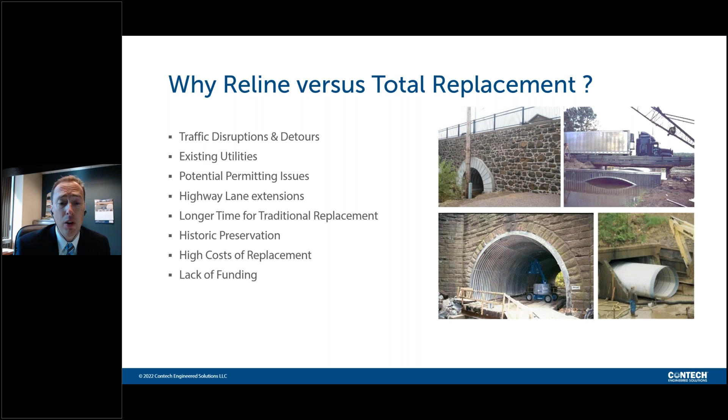If you've seen the past 2 years of where we've talked about pipeline rehabilitation, this agenda won't look new to you, but we're doing it a little differently this year. The last couple of years we focused on 7 critical design considerations, walking through each one and showing case histories. This year, Andrew and I are doing it differently: we're going to focus on 4 specific case histories and show how the engineer and contractor went through each of these design and construction considerations, diving deeper into specific case histories and showing you where and how these considerations affected each project.

One thing I'll point out is the fourth design and construction consideration, material and method selection. It's kind of an overlying consideration as you look at each of the other condition assessments, the hydraulics, the structural design. That's really what informs the material and method selection we're talking about. So it won't be a specific slide, but something looked at in each situation. After we finish our four case histories, we'll go through and reiterate the value that Contech brings and some of the other items you have at your fingertips.

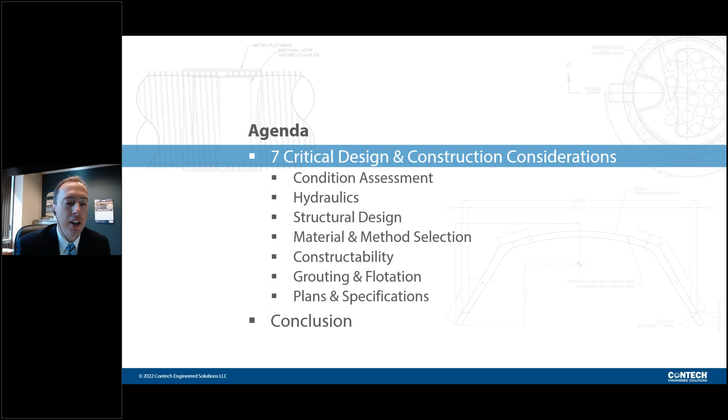I would be remiss if I didn't talk about the 14 products that we have for pipeline repair, bridge repair, and extensions. Today we're going to focus primarily on drainage structures, so storm sewers, culverts, and sanitary sewers. That's going to limit the products that we're going to talk about.

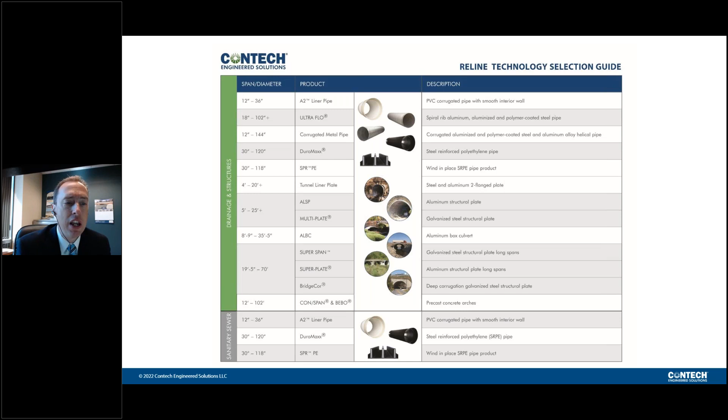On this slide you can see, especially from the bridge side, where we can actually reline a bridge, if you will, and we have that capability and that experience. So this is something that is available to you. Just because you're replacing a bridge, Contech can still help. But we're going to focus today more so on the drainage side.

So diving in first into our case histories. The first one is coming to us from Nebraska, and it's the Candlewood Reservoir Reline project. You can see from the aerial picture, a reservoir with a principal spillway, and that principal spillway was a 48-inch RCP.

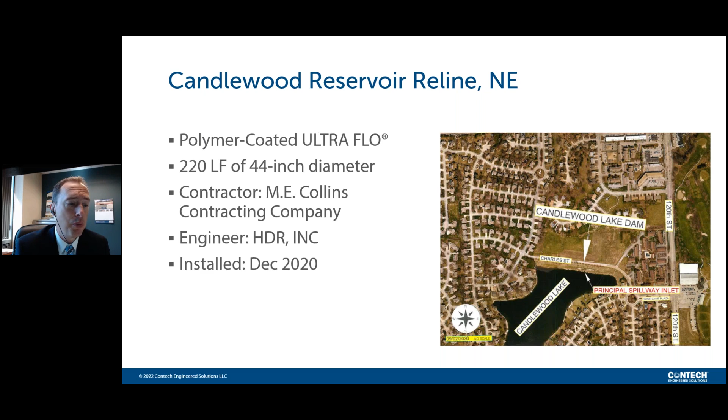If anybody has worked with dams in the past, obviously digging down and replacing infrastructure through that dam can create potential future challenges, just because of removing some of that soil and then having to put it back into place. HDR out of Omaha was the design engineer. Sean Bell was the engineer who worked with it primarily, and it was installed in 2020.

And then a profile view - this was taken from some plan sets that were pretty old, so it's not as clear as it could be, but it gives you an idea of the profile and the fact that we're close to 30 feet deep. So not only digging through a dam was a challenge, but the fact that it was 30 feet deep.

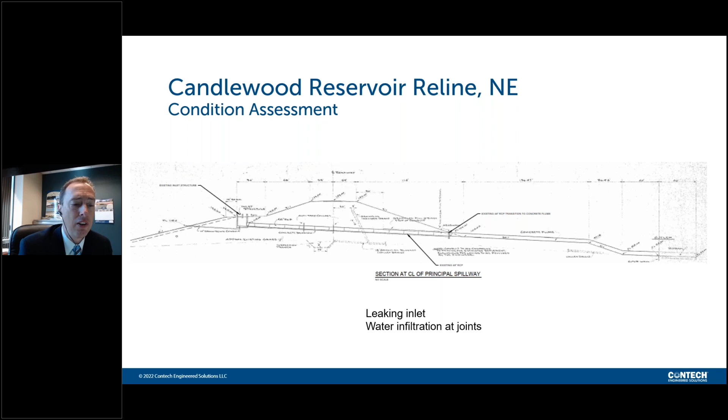HDR started off pretty quickly with, hey, can we rehab this without having to dig down? The challenges they were having was leaking at the inlet, which they were able to stop using separate materials. And then the real challenge that this project was focusing on was water infiltration at the joints.

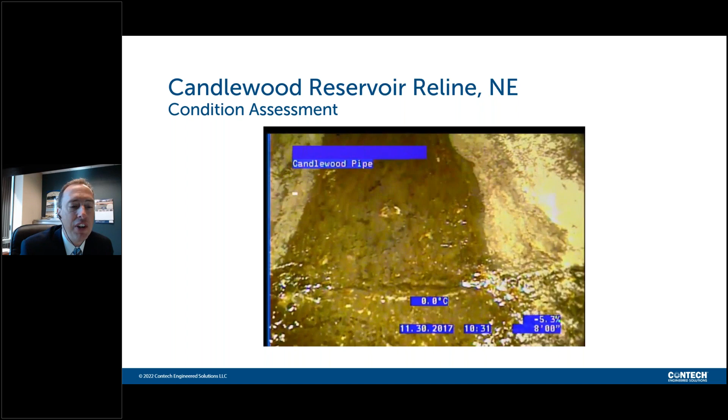So this is a video I'm going to show to you. This is some of the CCTV that we were provided with, and you can see in the RCP there's some spalling in the invert, and as the rover moves forward you see continued spalling, and it's going to stop at the next joint. This is not the entire CCTV, just a section - the entire CCTV was about half an hour to 45 minutes long.

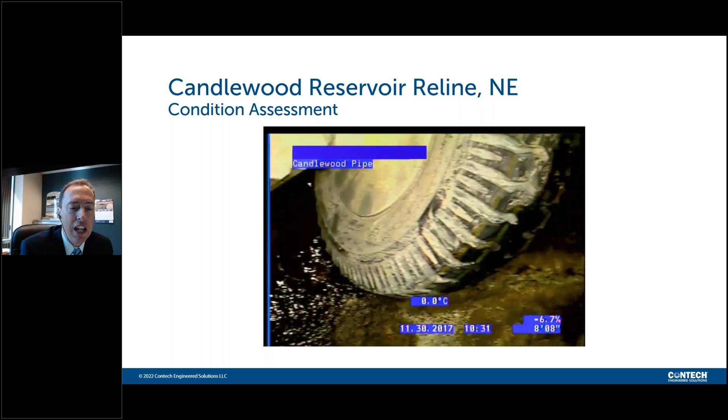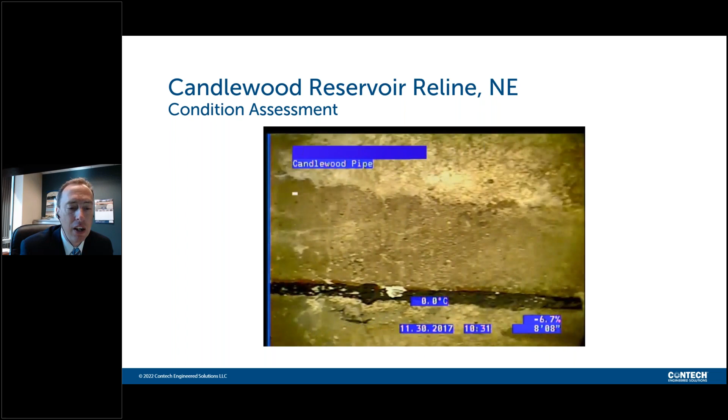As this pans up to show the joint, you can see some previous repair methods the owner had done using Ram-Nek and other types of materials to seal the joints to keep water from infiltrating through them. It's going to pan over to the rest of the area, and you'll be able to see some of the joint challenges the owner was having, which was the real reason they were looking at rehabbing this and stopping that infiltration.

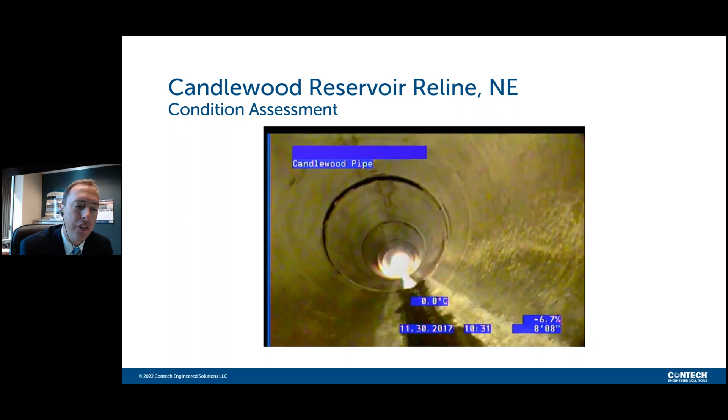As this video resets, you'll get to see some of the misalignment that had started to take place, and they were trying to offset some of that as well. So we had some relatively good information from the condition assessment that was taken.

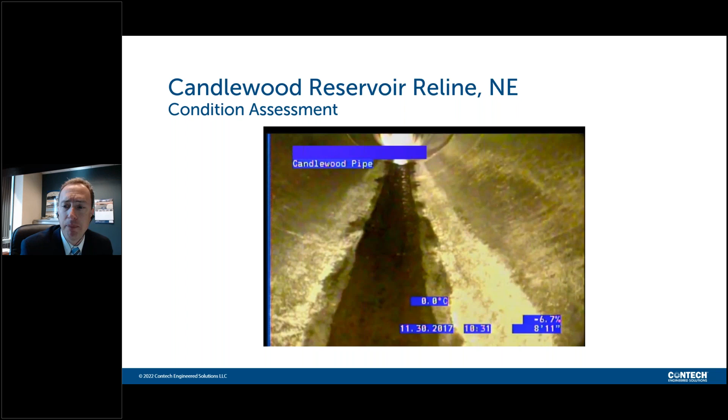With that, some of the first calculations HDR did was to determine hydraulically what was needed here. Hydraulically speaking, we were told we needed a Manning's n minimum of 0.012 and a minimum diameter of 44 inches, which obviously is not a standard diameter as you have it. So we started looking at three different products.

The first one is a DuraMaxx SRPE. It had a Manning's n of 0.012, so that checked the box. But the problem was the inside diameter was 41.3 inches - it did not meet the minimum that HDR determined was required.

A2000, Manning's n of 0.009, so we exceeded that there with that product, but the largest that product goes is 36 inch, so we weren't able to make that work. Ultra Flo, which you'll see some pictures of coming up in the next few slides, is a smooth steel reline product or direct bury product.

The benefit of this is because of the way it's manufactured, we can manufacture Ultra Flo to the nearest inch. So we're not limited to the nominal diameters, 36 inch, 42 inch, and 48 inch, like the other two products we were considering. Instead, we were able to make it at 44 inches ID.

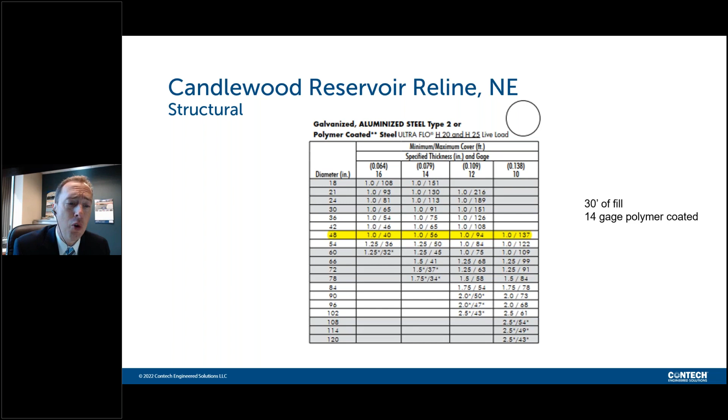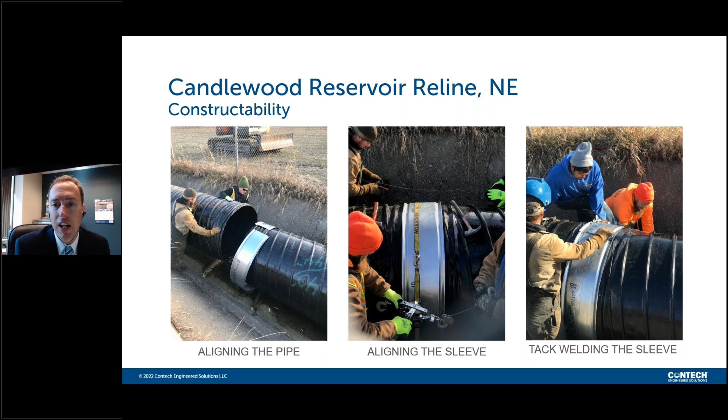There are many ways to install or slip line a culvert or outlet as we have here. The contractor from this end was pretty limited. If you remember from the plan views, we had an inlet end which would not allow any type of slip lining or access, so they had to push from the outlet end.

We used five 40-foot long pieces and one 20-foot long piece to have a total of 220 feet. We were able to use standard excavating equipment.

A lot of times, I mentioned we're using 40-foot sticks and a 20-foot stick. If this pipe was misaligned or damaged in any further way, we may have been forced to use smaller sticks. But from an economic standpoint, when we can use longer sticks, it's going to cost the job less - it's going to be more economical.

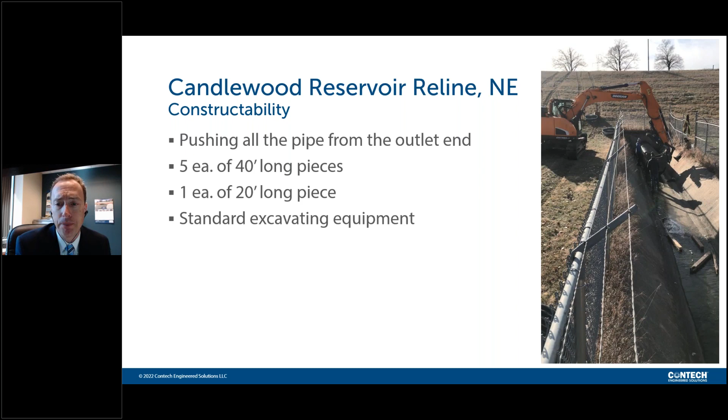I'll mention that from a grouting perspective, we get a lot of questions about what type of grout mix is needed. It's hard for a company with a national approach to tell an existing supplier exactly what we need. So instead we just look at guidelines. In most cases, local grout suppliers already have a mix approved by the DOT or local municipality that meets our requirements. We don't have a specific mix design because it's more methodical for us to provide simple requirements and let the local grout supplier find a grout that meets those.

The ideal, depending on diameter, is either 50 PSI compressive strength all the way up to 300 PSI compressive strength. We're not looking for anything very structural in terms of compressive strength.

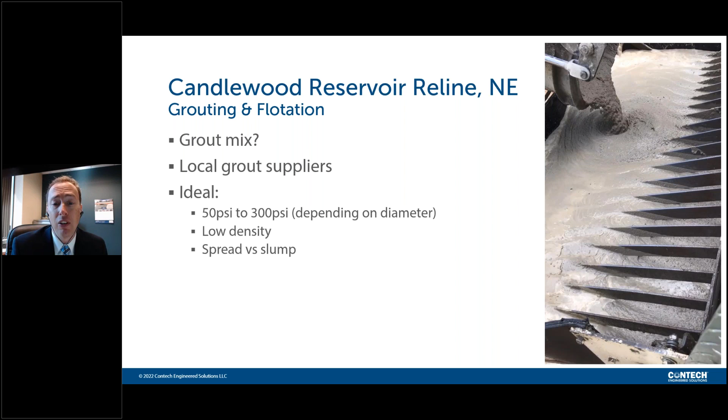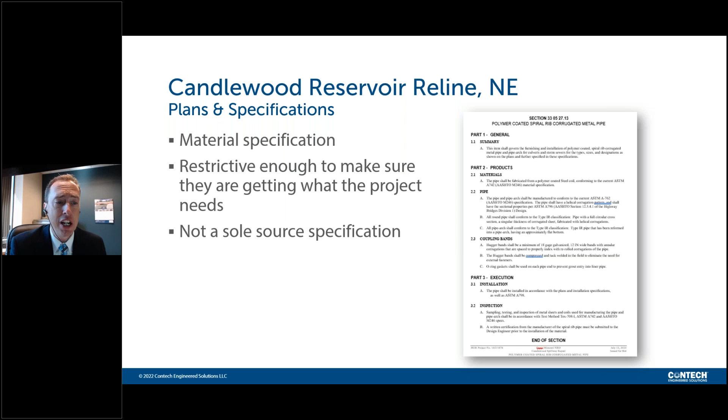Talking about plans and specifications, we worked with HDR to create a material specification, which was not a sole-source specification. It needed to be restricted enough around the diameter and the coating to make sure the owner was getting what they needed, but also something that more than one company, such as Contech, could provide. So it had to be tight, but not so tight as to be a sole-source spec. That was very important to all four of these projects we're going to talk about today, and we offer that process to everybody on this call.

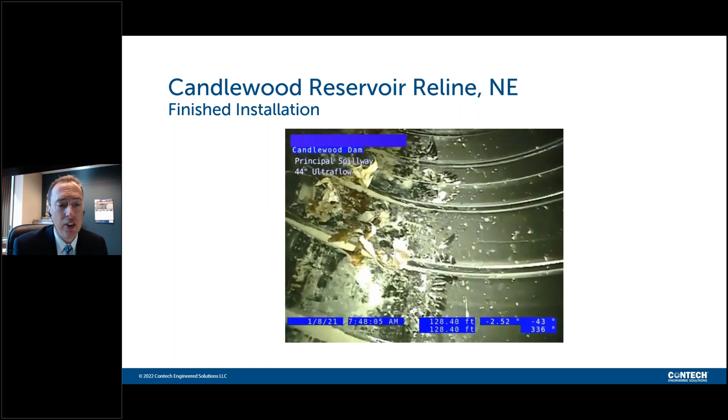The last video I'm going to show on this case history is really the project finished. It gives you an idea of what polymeric ultraflow is going to look like. You can see where you can get that Manning's n of 0.012, and it also gives an idea of how we can obtain a 75, 100, or even greater than 100-year design life. This also shows how it was important for HDR to fix some of the minor misalignments and put everything more in a straight line.

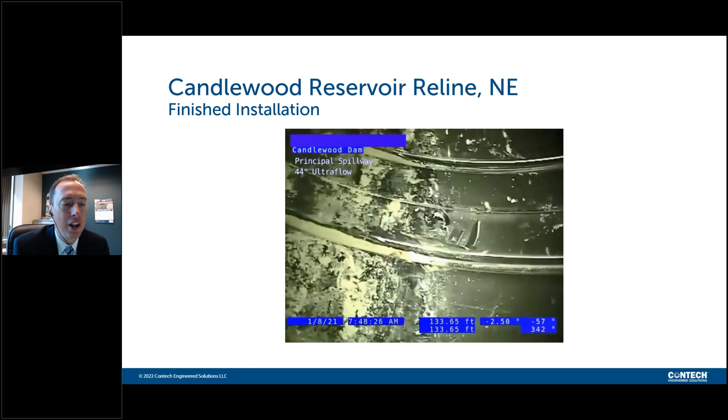What you see at the invert was from a post-snowstorm. We're close to the outlet end of the pipe here, and a lot of snow just happened to blow right up into the pipe and then froze. Some of it has melted and gone away, but what you're really seeing is leaf and debris that got blown up into the pipe and then was iced into place.

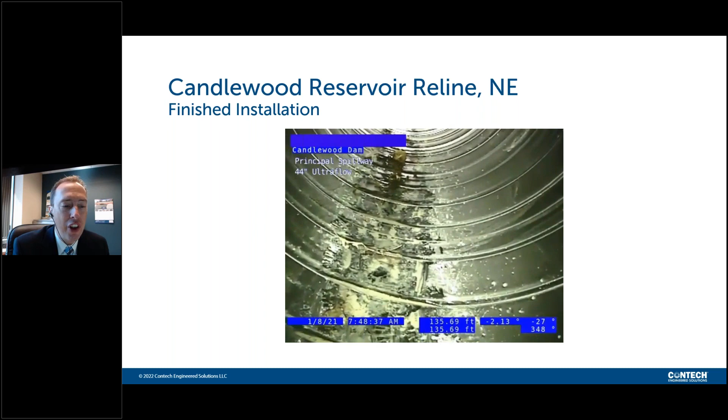So this was a successful project. I will say, from the grout perspective, we had some challenges just at the ending part of the grouting, where some of the pressure jacked, but the contractor was able to fix that, and we were able to satisfy HDR and the owner with their new reline pipe.

Jill, before I move on to the next project, I believe we have a poll question, do we not?

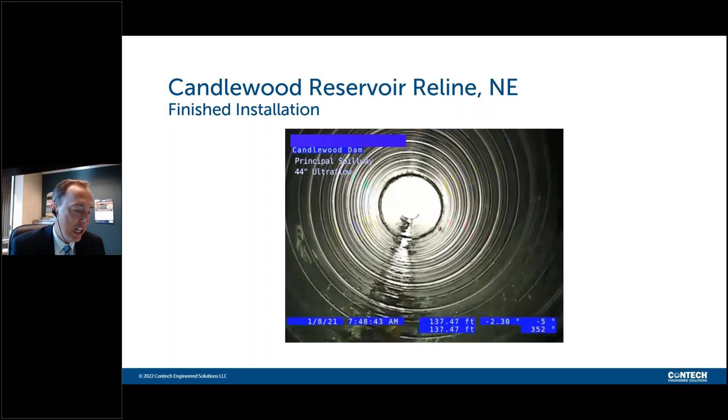We'll move on to the next case history, which is really a stone's throw away from the previous one. This is one in South Dakota, Yankton, South Dakota, in the southeast portion of the state, done by South Dakota DOT. This one had multiple projects. A lot of DOTs will assemble a lot of projects in a relatively similar area and then bid them all as one project in the hopes that it will drive down the price of the entire combination of projects.

On this one, we had two different products that we were looking at, A2 liner and DuroMaxx, so different from the previous one. This was installed in 2020.

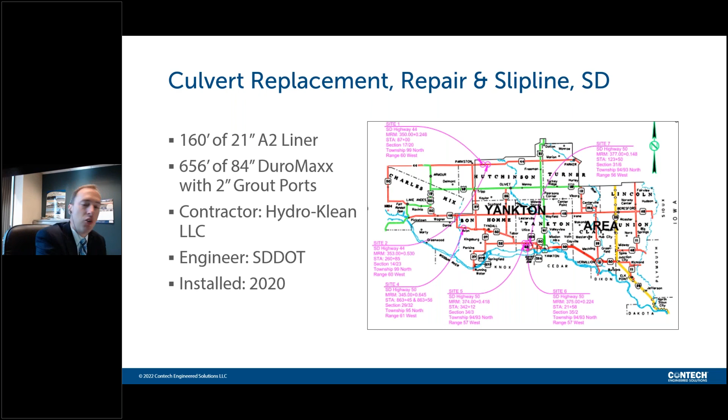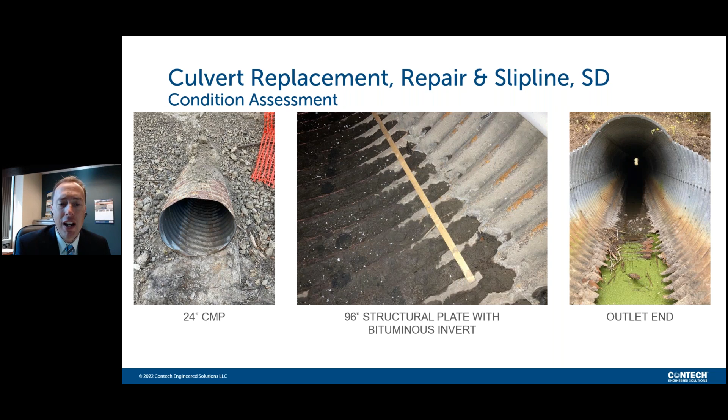Moving into the hydraulics section, hydraulics can be tricky from a design standpoint. When we're looking at a closed system, such as a sanitary sewer or a storm sewer, everything comes into play. By everything, I mean Manning's n, pipe slope, open area, and diameter of the pipe.

All of these things come into consideration when determining if we're hindering or improving the hydraulic capacity. When you're looking at culverts like we are on this project, that would be considered outlet control. In outlet control, things like Manning's n, diameter, and pipe slope all come into play. Whereas if the pipe is in inlet control, the only thing that matters is the diameter and how the inlet end is treated.

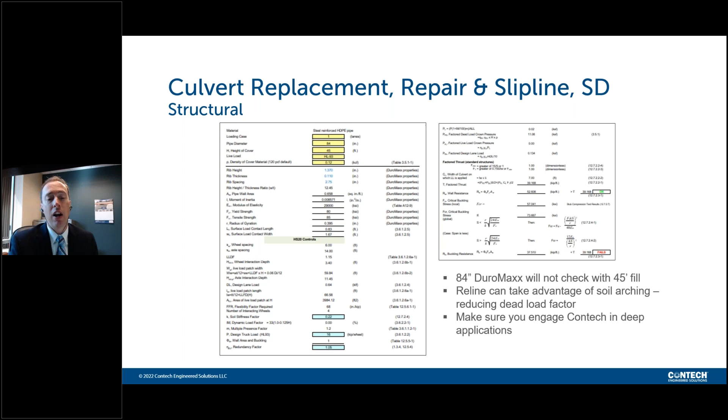So what we could do is reduce the dead load factor in these AASHTO LRFD calculations and make it check out. We were able to do that for 45 feet of fill, but I will caution you, this is something we need to be brought in together on very frequently and very early when you have deep cover.

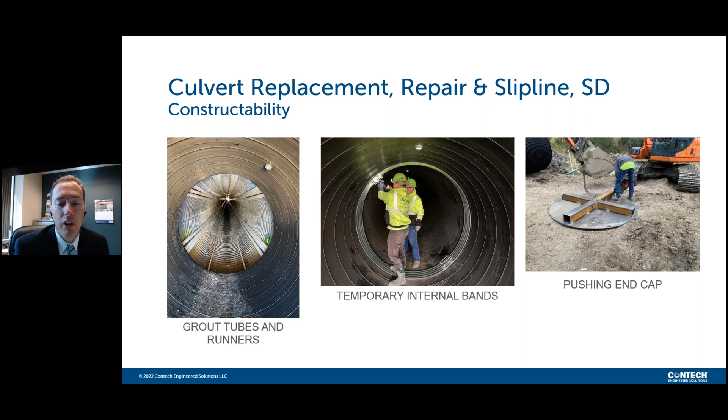They're using temporary internal expanding bands to keep the grout from moving through the joints during the grouting process. And then something the contractor created was an end cap, which you'll see in this next video.

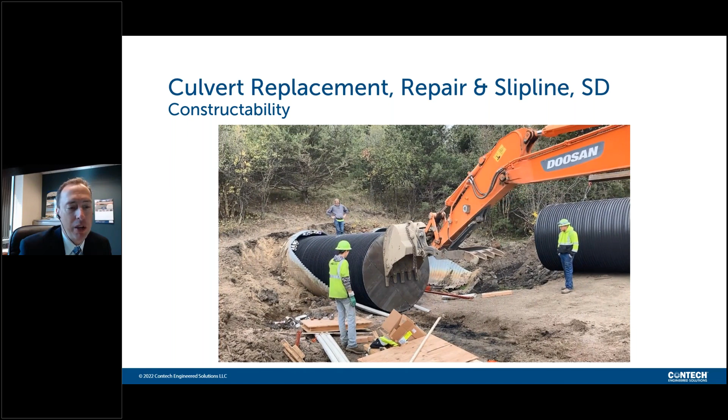This video again shows them using the equipment to continue pushing this pipe into place. It sounds like some grease could have been used, but other than that, you see them being able to push against that plate they developed and push that entire 84-inch pipe all the way through.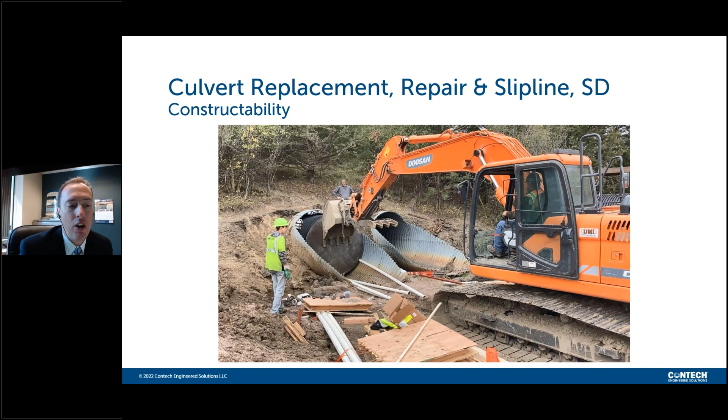Diving in a little more on grouting and flotation, there are really three considerations you can look at when holding down the grout or holding down the pipe during the grouting process.

In this case they used jacks - you see that highlighted in green in the calculations at the bottom. But you could also add water into the pipe if water is easy, or add other types of weight - I've seen contractors use things like jersey barriers to add weight to the pipe to hold it down. The other thing we look at on this slide is the grout density.

In this case we were looking at 130, which is actually quite dense. We're looking for something closer to the unit density of water itself, because that's going to decrease the buoyant force acting on the pipe.

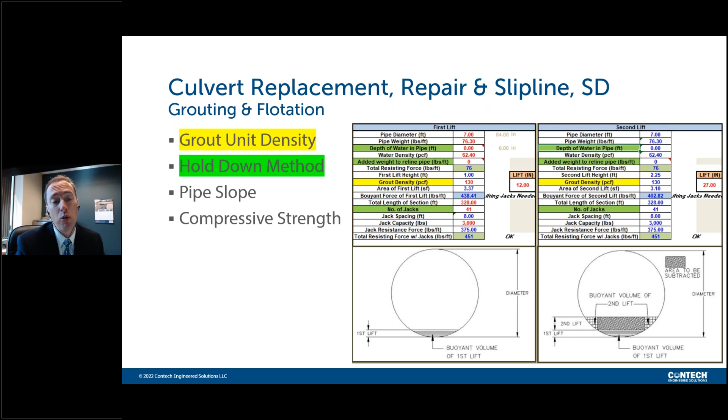The other item that may not be as readily apparent is pipe slope. If you can imagine, we have a minimum grout height - or a maximum grout height - of 12 inches, as we saw in the last calculation. But the pipe is on a slope and it's long. If you've got 12 inches of grout at the inlet end, you're going to have closer to 16 to 18 inches of grout at the outlet end, and that's going to float.

So to keep that from happening, many times you're going to need multiple lifts in order to not float the pipe. And then compressive strength is always something - we already mentioned that on previous slides, so I won't go into too much more detail there.

Moving into the actual grouting, you can see they used jacks on 8-foot spacing - those are just jacks with 3,000 pound capacity. And then once the pipe's in place, the contractor will build a bulkhead where the grout tubes are coming through.

And you can see on the right-hand pictures, we had cellular concrete. Basically concrete or grout was delivered to the job site, and then the truck on the right is actually taking that grout and turning it into a cellular concrete or cellular grout mix, and that's being pumped down to the bulkheads where they're going to pump that grout through.

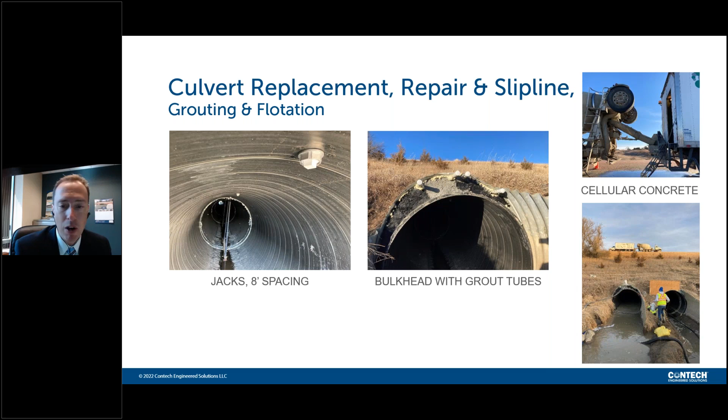From a plans and specification standpoint, again like the previous project, multiple products were approved for each line, but Contech was able to win the day with our DuroMaxx and our A2000.

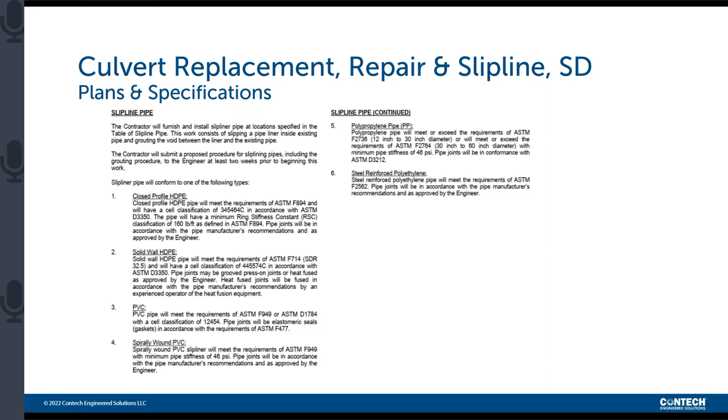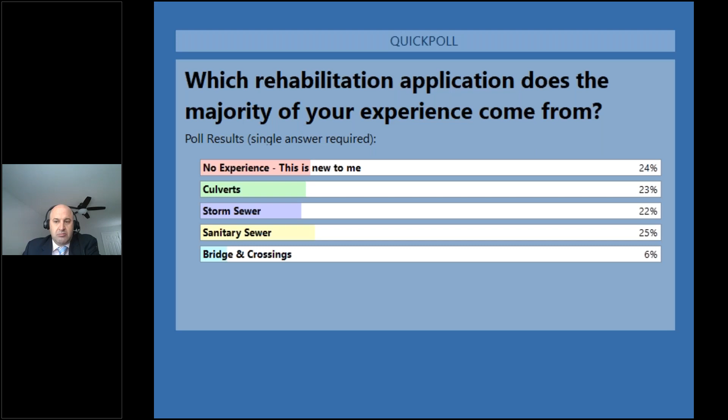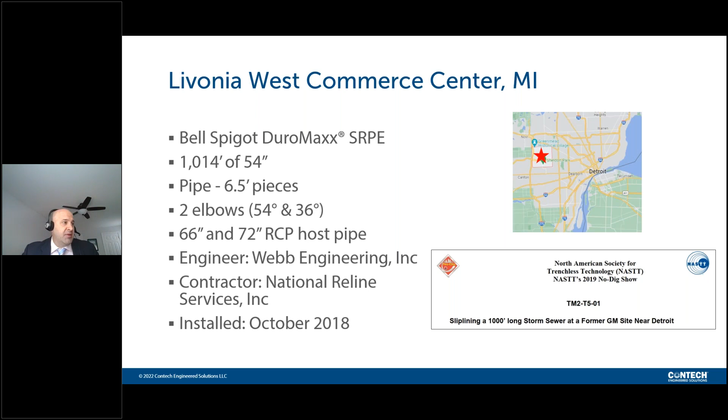This was a job site that was an old General Motors plant, a spring and bumper plant. During the project assessment, it was determined that there was an environmentally hazardous chemical in the groundwater, and that was infiltrating the RCP storm sewer, which was a big issue for the developer who was going to redevelop this site.

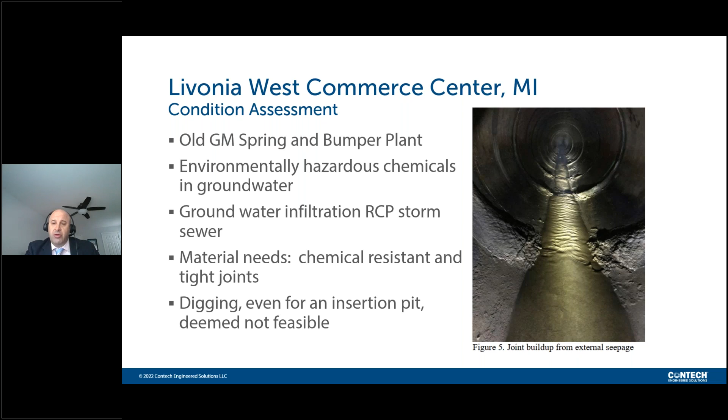The plant was closed around 2001 or so, and there was a developer looking to redevelop the project. So they needed a reline solution that would prevent the infiltration of this hazardous material or contaminated groundwater. The material needed to be chemical resistant, but really needed good joints and water tightness.

Early on, they looked at digging, and one of the big problems here is the groundwater. They figured that even doing insertion pits, excavating them, was very problematic economically. When looking at the hydraulics, one gift here is that the existing 66 and 72-inch storm sewer was actually over-designed for what their needs were for this new development. So that's a key here, and that's why we used 54-inch pipe.

So this is all about the groundwater. There was some abrasion in the host pipe's invert, so we knew that the 54-inch DuroMaxx, which has a 0.012 Mannings n, was going to provide enough hydraulic flow for the current development and its needs. And this was going to be a wet installation, so that's key as we get into this.

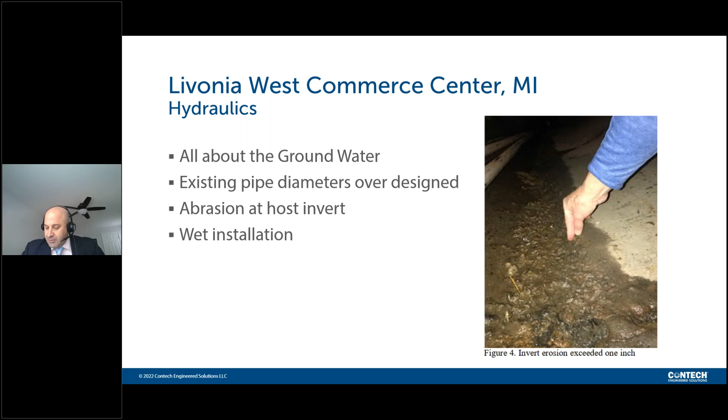Structurally, they did want us to do a PE stamp on this project, and rightfully so. This is a pretty deep storm sewer - it's pretty rare to see a 19-foot deep storm sewer. So they did have structural concerns. Now the RCP was in fairly good shape, other than the joints themselves and abrasion of the invert.

But we always look at this as if it's just a direct bury. DuroMaxx has no problem dealing with 19 feet of cover with 54-inch pipe, and we were concerned about the groundwater being above the crown of the existing pipe. So all that was reviewed, and that's something that Contech likes to provide our stakeholders in these projects, especially something as complex as this.

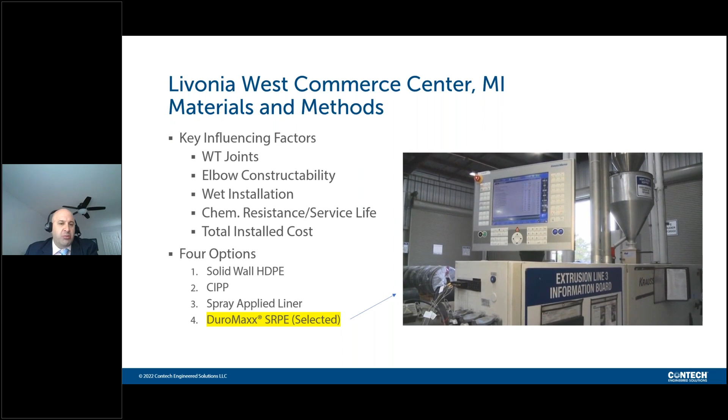So go ahead and play this video. I just wanted to show DuroMaxx being made so you guys can kind of see what the product is. A lot of people aren't familiar with steel reinforced polyethylene.

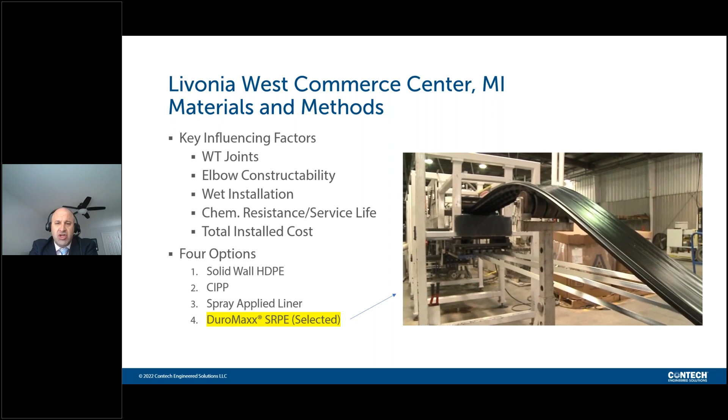This is the one slide where we are talking materials and methods, because this project went through design considerations for some time. Again, some of the key influencing factors here are the watertight joints, those two elbows I mentioned earlier, and how to negotiate that in a reline situation, what products could be used.

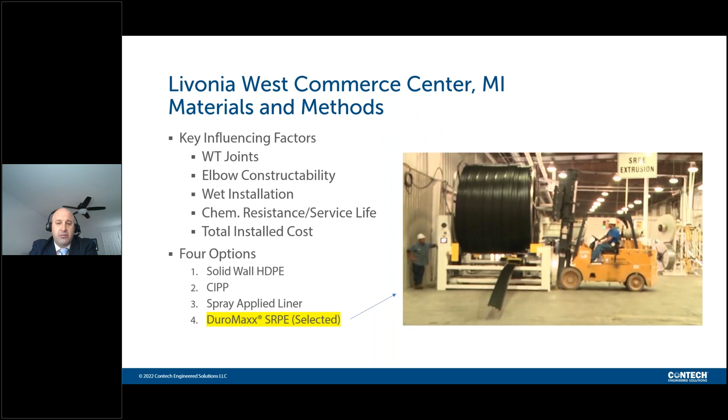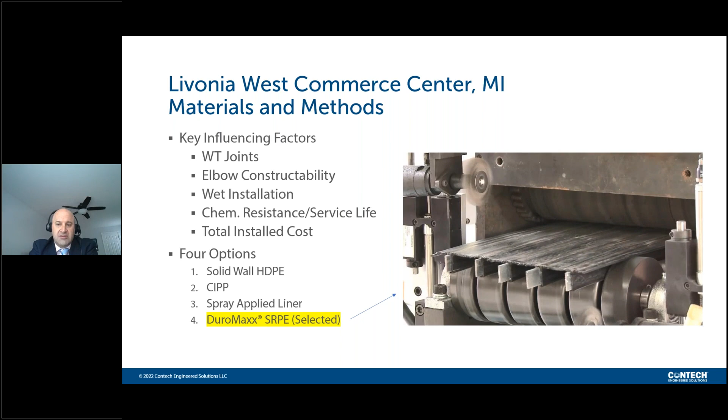This was considered a wet installation, meaning you couldn't dewater the host pipe completely - it was too cost prohibitive. There is a chemical resistance issue here too - it's not just stormwater, we have some contaminated groundwater concerns. But they were also looking at service life, including structural service life, as this thing needs to maintain for many years to come. And again, the total install cost was really coming into play.

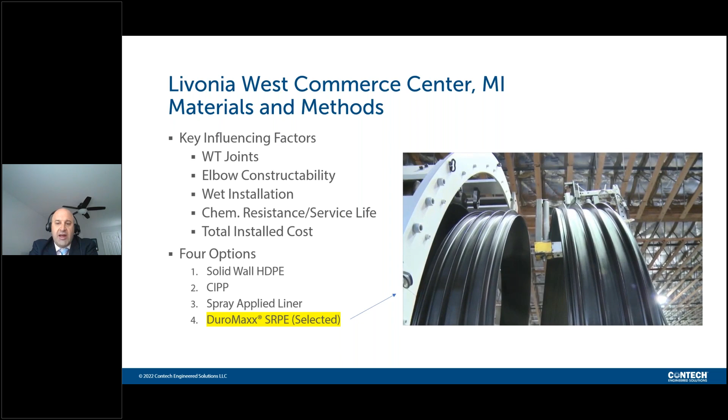Each idea that the engineer was looking at kept running up against a pretty tight budget. So the four options began with solid wall polyethylene butt fused - again, insertion pits created an issue with this solution. They then looked at cured-in-place and spray applied products - again, dewatering was not an option, or it was a very expensive option, and both those need a dry interior. So that's when it went on to a segmental or slipline idea, and that's where DuroMaxx was chosen, and it has a lot to do with the versatility of what this product can bring.

And the key here is that 6.5 or 7 foot long piece of pipe. On the far east side of the project, there was a catch basin, 9 foot diameter, and the unique part here is we were able to access that by pulling the lid off and drop it in these short segments. Now, normally we tend to try to use as long of a stick as we possibly can ship.

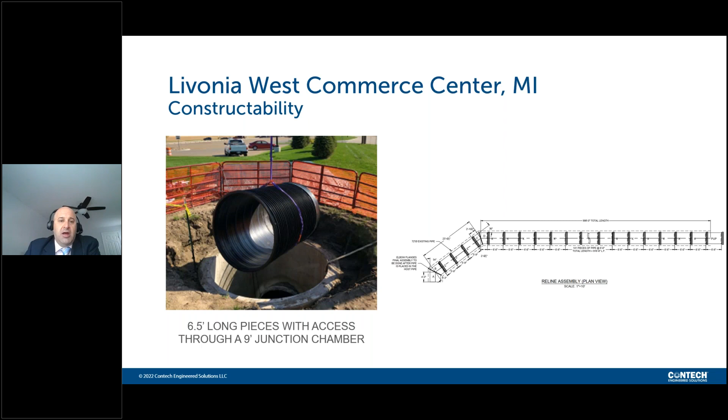Well, we had some kind of luck here with the 66 and 72 inch host pipe being over designed, allowing us to use a much smaller product for meeting the hydraulic needs and allowing us some room to negotiate inside the pipe itself. Next slide.

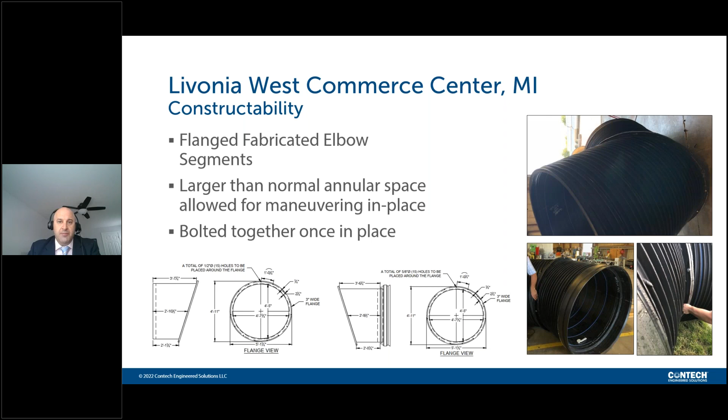What you're seeing below is just the drawing of the spigot on the left and the bell on the right. So this allowed the contractor to go in and negotiate those elbows and get these placed 19 feet below ground. Very unique application. Next slide.

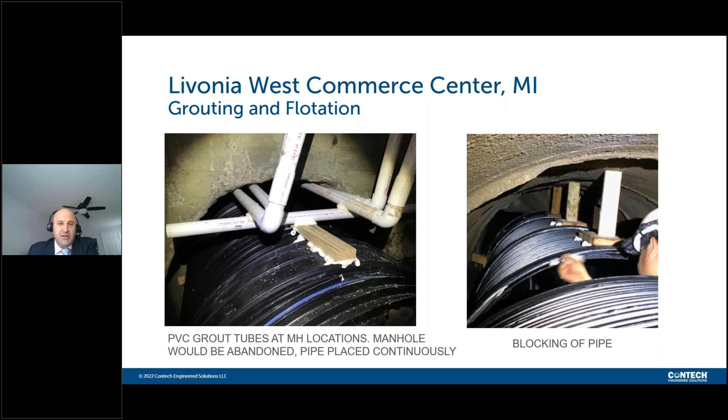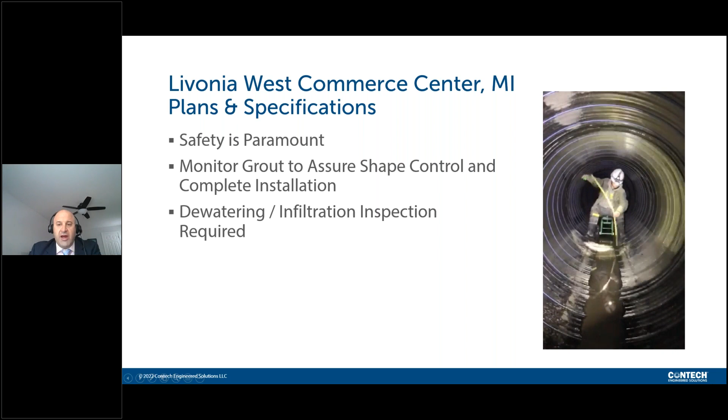As far as the plans and specs, a couple of things were requested. They knew they had issues with infiltration, so they wanted to make sure this thing was going to be watertight after it was installed. There's a lot of concerns when it comes to grouting something this deep into the ground. Grouting pressures all need to be monitored, and we worked with the engineer and the contractor to really spell that out in the specifications.

They also asked that they do some sort of monitoring in the pipe itself during the install. What you're seeing here on the right in the video is a gentleman down there with a tape measure, basically measuring the ovality of the pipe to check as we grout that it's maintaining its shape. There are also methods where people use rubber mallets and do sounding on the wall to hear if the grout is filling as designed, verifying that there's no void spaces and things like that.

Safety is paramount, obviously, in these types of situations. But once the project was done, there was an infiltration inspection requirement, and they did that with TV. Next slide.

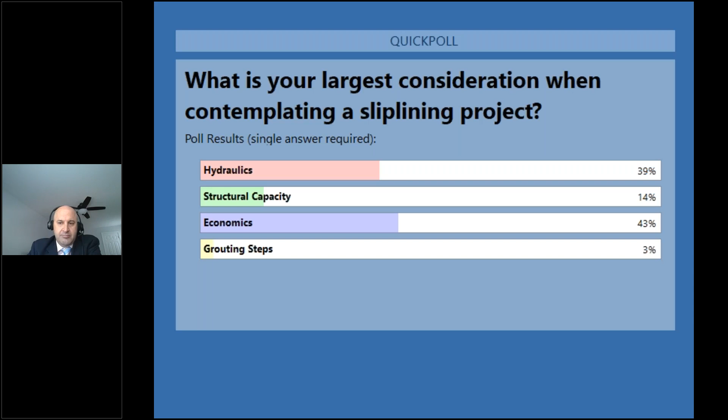Okay, well Andrew, it looks like 39% say hydraulics, 14% say structural capacity, 43% say economics, and 3% say grouting steps. Awesome. Thank you, Jill. Thank you, everyone who's participating in those polls.

It really helps us. As far as that last project, for those who didn't get to see that video when we first started, if you go to YouTube and type in Livonia and DuroMaxx, it's worth looking at. There's some really good pictures and things like that to showcase that project. The last project we're covering today, I'll go ahead and go through this fairly quickly since we've really covered a lot of this for the other three projects, a lot of the considerations.

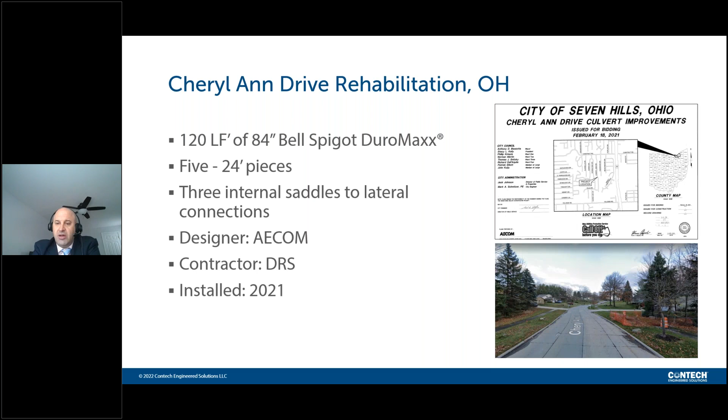This one's in Ohio, up near Cleveland, northern Ohio, and it involved an 84-inch reline using DuroMaxx. It was in a metal structure. This is a busy road in a residential area, so it was paramount that they really wanted to do a reline to not have issues with impeding upon the traffic with the neighbors nearby. This was done with 5 pieces, each 24 foot long. The unique part about this project we want to showcase here is the internal saddles primarily. This was designed by AECOM, and we've done a lot with those guys up there, and this project went very well for us just a couple years ago. Next slide, please.

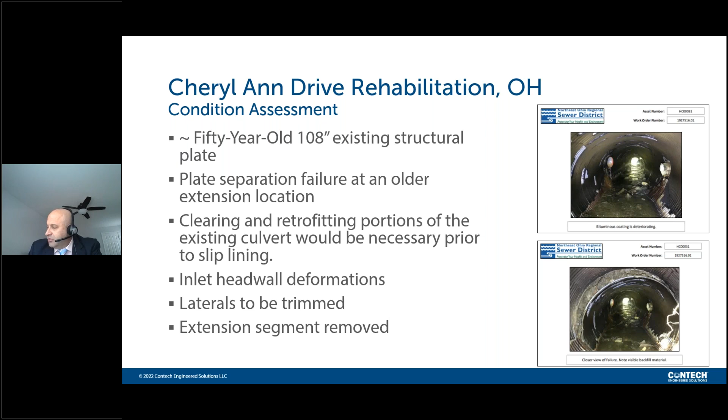One of the big concerns here hydraulically wasn't about the slip line itself. It's always an issue when you slip line, whether the product you're using is going to meet the needs of the design. But there's also concerns with the abrasion level and hydraulics coming through it and what product would work best. There were other products specified once this went to bid, but when Contech was discussing with the engineer of record, we had a couple different options we could provide. Because of the abrasion level being 4, potentially a class 4 per FHWA, which is a severe abrasion, and knowing the flow rates, the DuroMaxx product was chosen. Polyethylene is a very abrasion resistant material. When we went through and demonstrated some abrasion type of analysis for the engineer, they went with this product. Next slide, please.

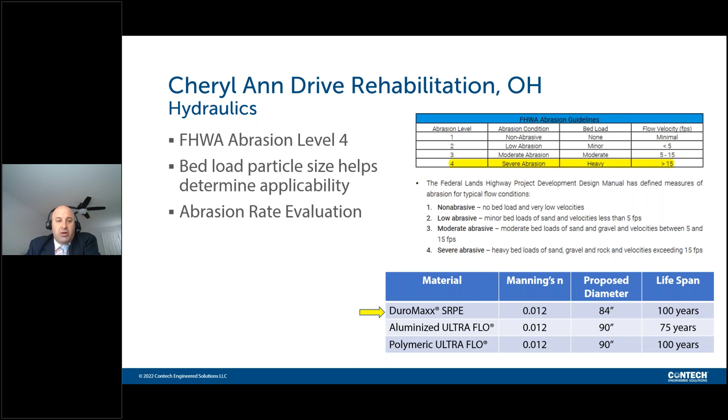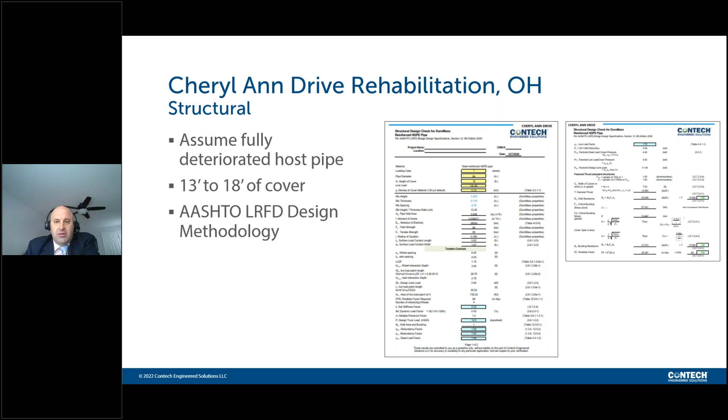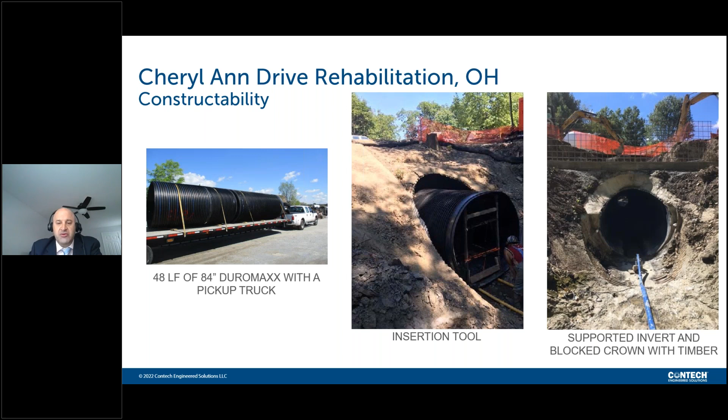The steel reinforced polyethylene pipe is very efficiently designed, and you kind of see this in the photo on the left. It's 48 feet of 84 inches, literally driven there by a pickup truck. So the lightweight nature makes this thing easy to install and quick. You can see they're using an insertion tool. This was pulled into place via a winch. Next slide, please.